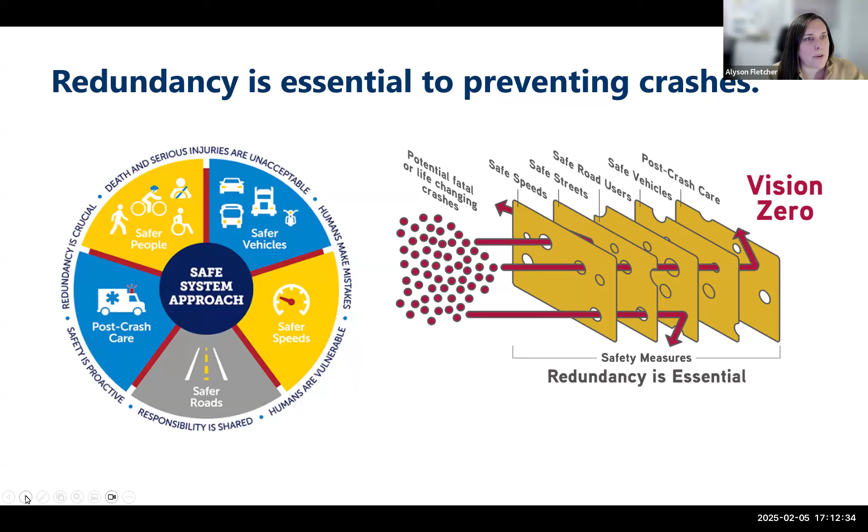Before that, we wanted to just give you a bit of insight into where we're headed. Building on the schedule I gave a preview of earlier, we've been in the business of identifying high crash locations and developing a network of where those are.

Then we start looking at the crash factors -- what are the trends of the things happening on the vineyard in terms of crashes? Then we use that to move toward what countermeasures can reverse the particular distinctive trends in your geography to develop potential projects. And then we rank and prioritize those and create a safety action plan toward implementation.

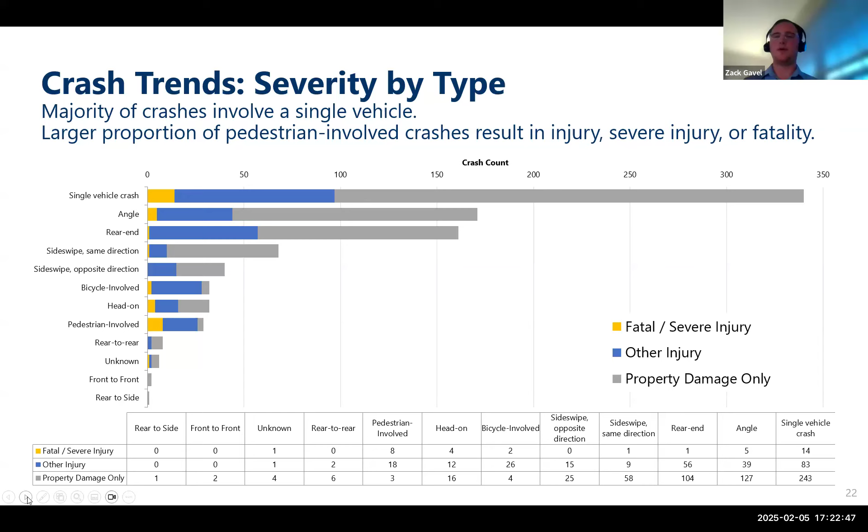So those are the trends we're looking at, trying to understand them a little bit better and then think about what solutions might be appropriate to start to mitigate some of those impacts. I know I mentioned that single vehicle crashes are the most common and the most severe in terms of crash types. You might be wondering, what is a single vehicle crash?

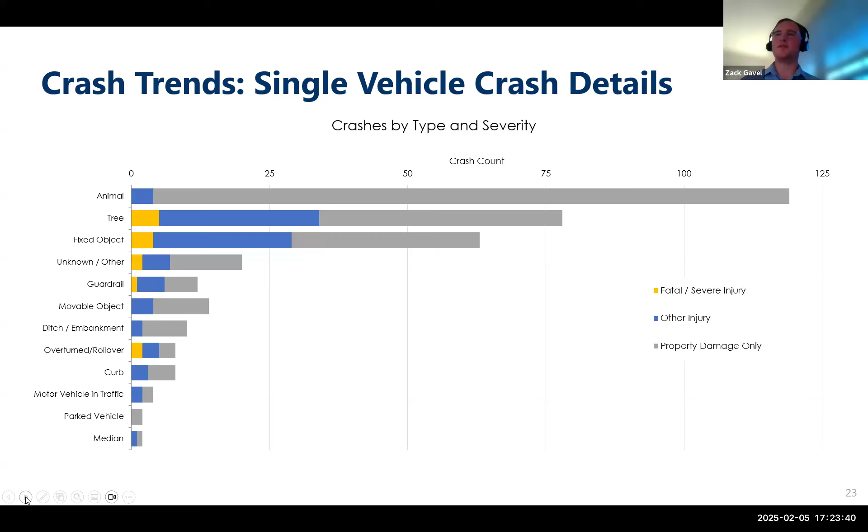A single vehicle crash is where only one vehicle is involved, and typically it collides with something off the roadway, like a tree, a fixed object, or a guardrail, or it doesn't collide with anything in particular, but it rolls over, ends up in a ditch or an embankment or something like that. Where we often see those crashes are on the more rural parts of the roadway network further up island, and we'll get into that a little bit more later in the presentation. It's less likely that those sorts of crashes result in severe outcomes when they happen in some of the down island, downtown areas, commercial corridors. It's more once you get further out where the island opens up a little bit and feels more rural, where we're seeing more of those crashes concentrated.

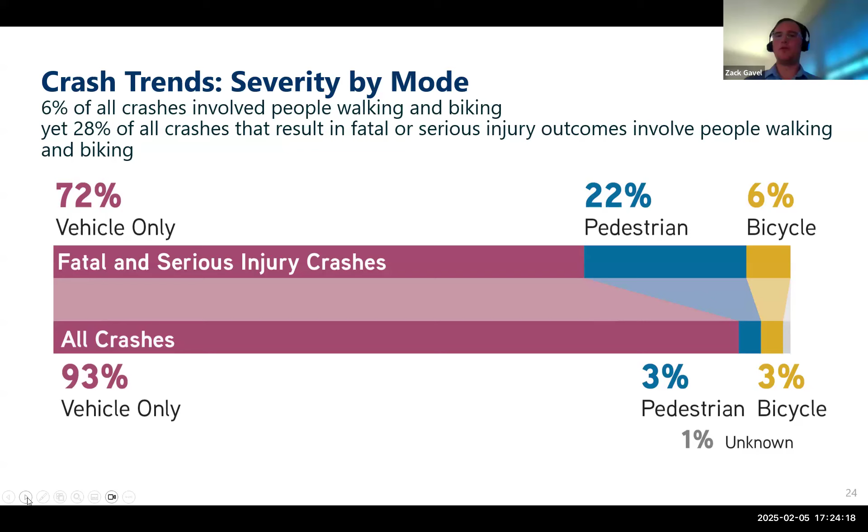I was mentioning earlier that the rates of bicycle and pedestrian crashes are exceeding the statewide average on the Vineyard. When we look at that compared to the total number of crashes, only 6% of the total crashes involve someone walking or biking, but 28% of the crashes that result in a fatal or serious injury involve someone walking or biking. So there's really a stark mismatch between the total number of crashes and the impact of those crashes on the folks involved. That's something we're really focused on trying to head off.

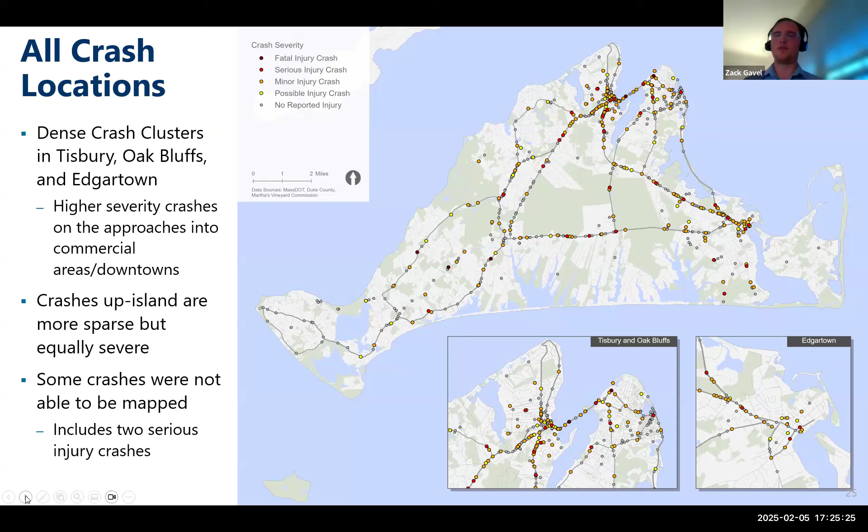What we are noticing is that there are dense crash clusters in Tisbury, Oak Bluffs, and Edgartown, those downtown areas. But crashes up island are a little more sparse, though that doesn't mean they're less severe. In fact, many of those fatal crashes are on rural roadways up island. Just to caveat, there are some crashes we're not able to map, as a product of the reports we get from DOT, which makes it so we can't always locate them in space, but we can still understand some of the trends and what may or may not be causing them.

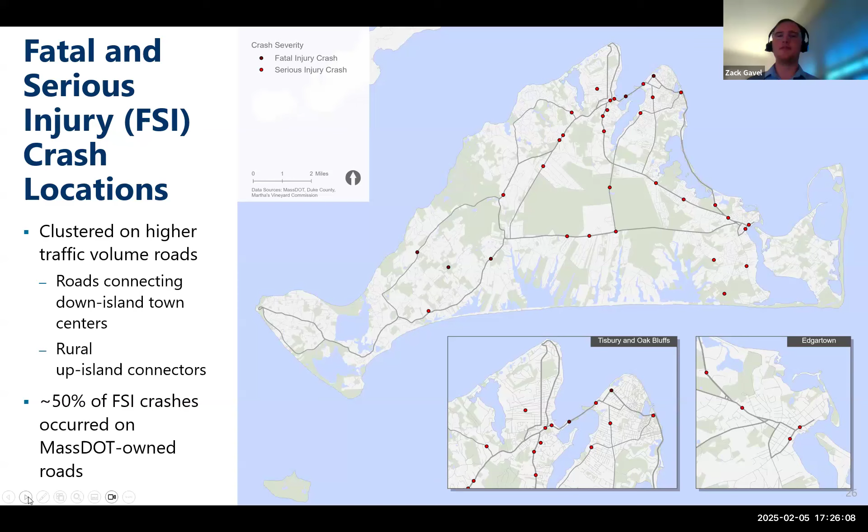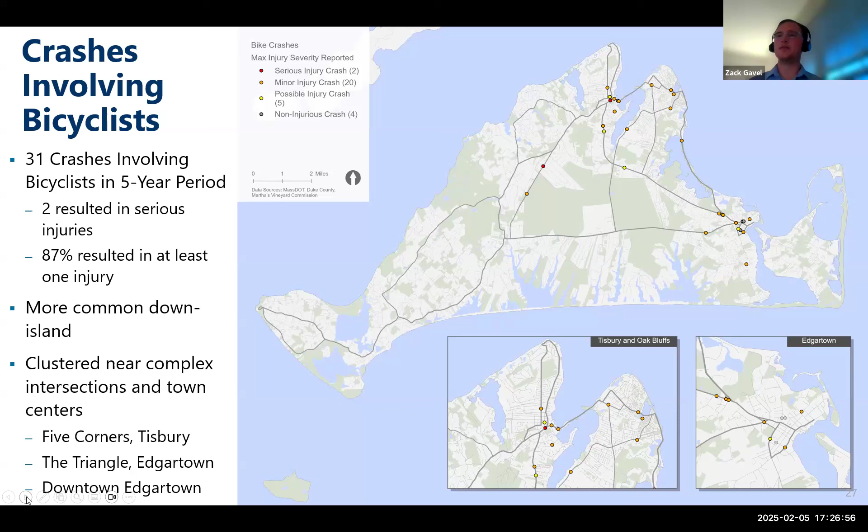When we look at where crashes involving cyclists are occurring, there were 31 of those crashes in the 5-year period we looked at, and 2 resulted in serious injury. Thank goodness, no fatalities during that time period, but 87% of those crashes did result in at least one injury. They are more common in the down island area, particularly in Tisbury near the Five Corners intersection, near the Triangle in Edgartown, and in the general downtown Edgartown area. We're seeing clusters near complex intersections and town centers, places where it might be more difficult to navigate as a cyclist, or places where you'd expect more cyclists because it's a popular destination.

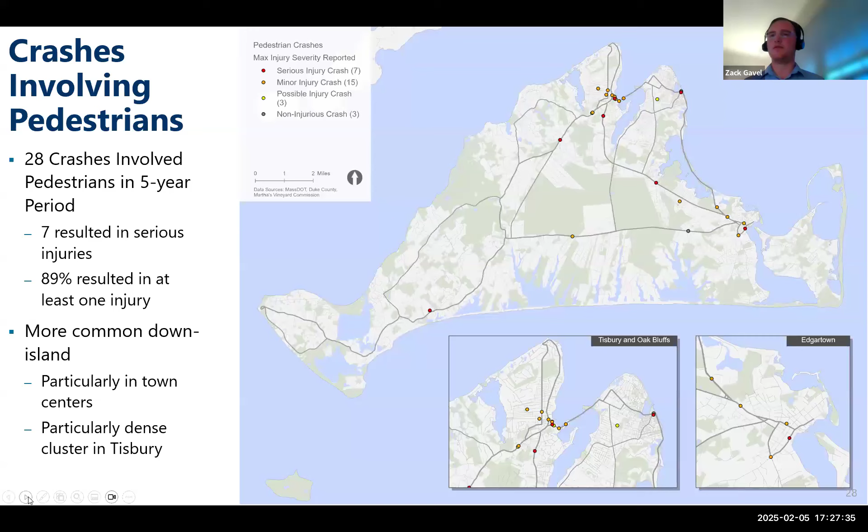So, thinking about that in conjunction with the broader conversation about how we're treating rural roads, understanding that there are a variety of different modes using those roads and how we safely accommodate all of those different uses.

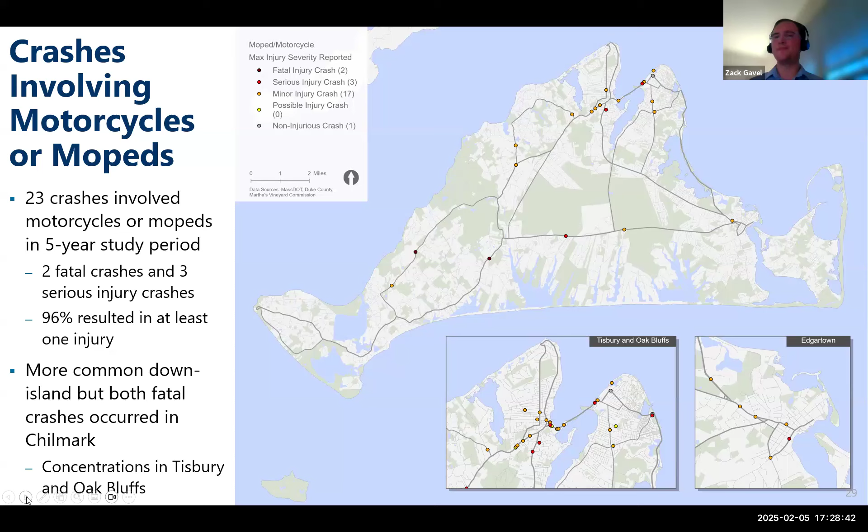And speed. Speed is the big thing in a lot of the safety work that we do. It's a very basic kinetic energy equation to understand how speed impacts the severity of crashes and the forces that act on your body in a collision. So speed is something we really want to take a close look at.

What we're seeing across the island is that speeds are generally higher than the posted speed limit, with data thanks to Bill and the folks at the Martha's Vineyard Commission. And while some of those really extreme instances of speeding—20, 30, 40 miles an hour over the speed limit—are rare, they are extremely dangerous.

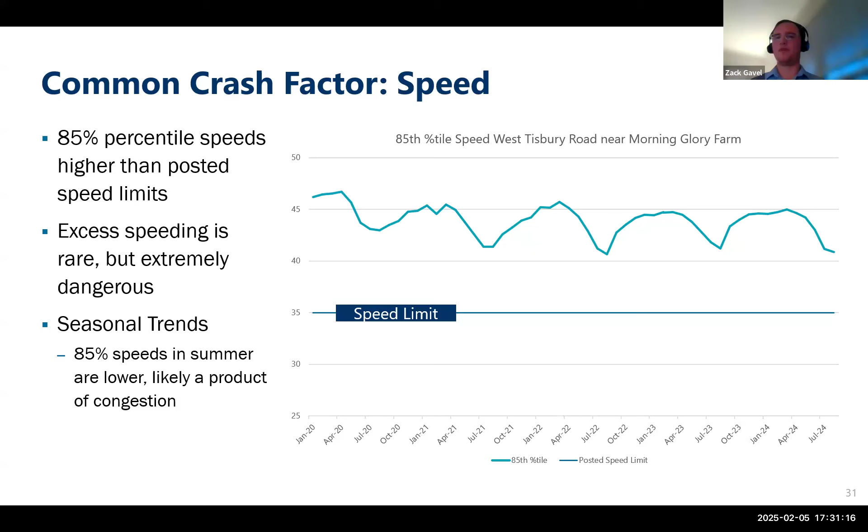Just to take a step back, the 85th percentile speed, which is what this shows, is the speed that 85% of people driving are going at or below. So just thinking about ways to make that a safer environment for everyone, whether it's designing for slower speeds, setting lower speed limits, or enforcing the speed limit more actively, educating folks—a whole host of different countermeasures we can look at here.

To put this into a finer point: when you're traveling at a higher speed, your ability to react to changes within the roadway varies pretty dramatically. For example, a pedestrian stepping out into a crosswalk in front of you—at 20 miles an hour, you might have enough time to react and brake. But as you get up towards 30 or 50 miles an hour, you might not have enough time to react and brake before colliding with that pedestrian.

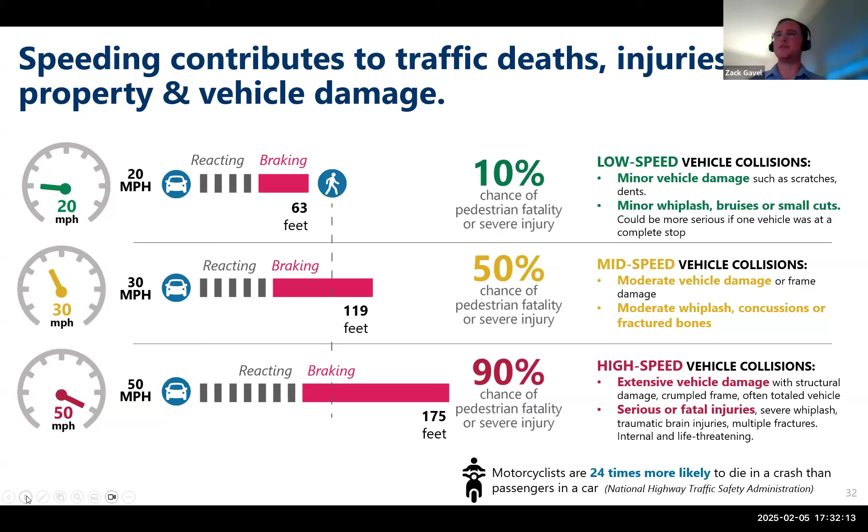So the chance of the pedestrian surviving or not being injured in that collision is significantly better at lower speeds. We're starting to think about this more holistically—how we're designing for all roadway users. Part of that is designing for safe speeds, one of the 5 pillars of that safe systems approach that Allison was walking through earlier.

So that sort of generally talks about the crash trends. The thought there is just to walk through a whole bunch of data so that you have a sense of all of the different work that we did. There's a memo on the Martha's Vineyard Commission website where you can get into the data a little bit more closely. But part of this exercise is not just to look at all of these trends, charts and graphs, but also to make sense of where we really want to focus our effort.

So the next step of the process is creating what we call a high injury network. A high injury network is a network of locations across the island that represent the places where the most severe crashes have happened over that 5-year period. We're using that network of roads and intersections to understand where we want to focus our work as part of the plan, so that we can think about how we target our work more strategically, so that there's really sound and smart investment of the resources that might be available for safety related projects.

As I talked about before, we start with that 5 years of crash data, and then we pretty much assign it to different roads on the map. We say, okay, that crash happened on Edgartown Vineyard Haven Road, perfect. We aggregate all the crashes that happened in similar places together, and we start to look for trends in space across the map. And so what we get to is something that looks like the map that you see on the screen.

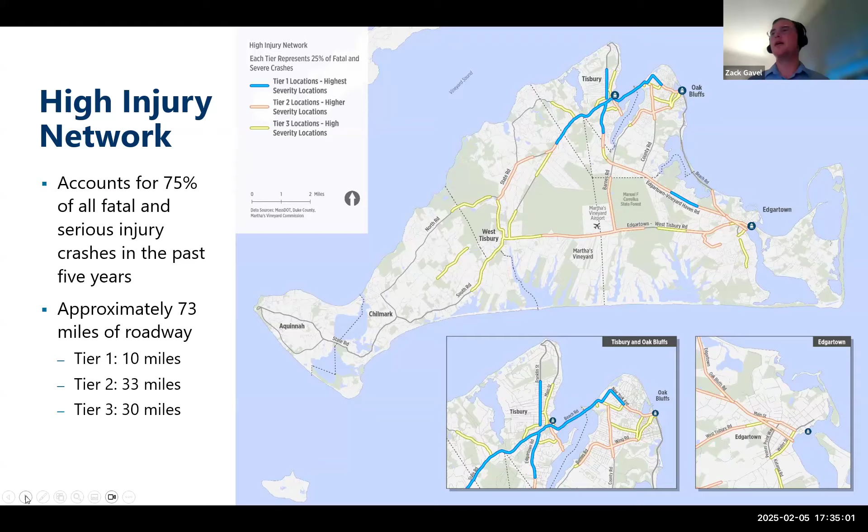So just to zoom out a little bit, so you have a sense of how we come to that high injury network: it's a combination of those top corridors and also top intersections. The reason why we think about those two things separately is because we want to be strategic about the strategies to address the challenges we're seeing based on where those challenges are occurring.

If we have a lot of crashes happening along a long stretch of road and we say, well, we're just going to fix all the intersections, that might not really get at the root of the problem. Or the inverse might be true: if we try to redesign a roadway, but the challenge is really pinpointed at an intersection, we might not be doing the best possible job we could to address the safety related challenges. So we're looking at it two different ways here.

You'll notice that these are generally across all the different communities on the island. There is a slightly higher concentration in the down island communities versus the up island communities. But that is not to say there aren't roadways worth looking at in pretty much all the communities, actually all of the communities across the vineyard.

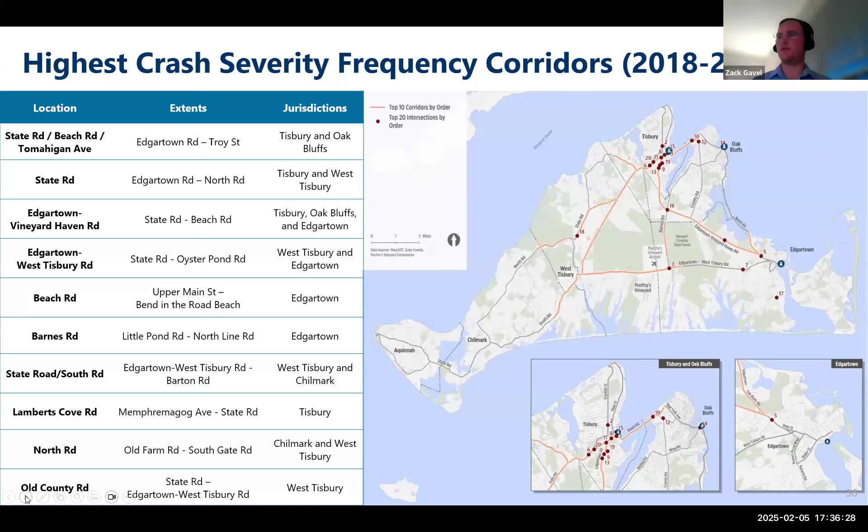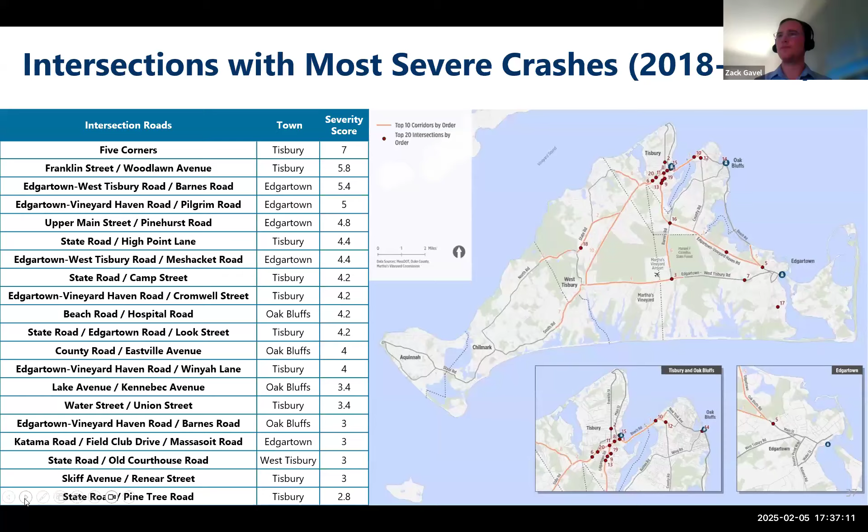I'll start to wind down my presentation by talking generally about the trends we've seen on different types of roads. The first stage of the presentation was all those charts and graphs, which might have felt a little detached from the island you all know, so let's walk through generally what's happening on different types of roads on the island.

In your commercial corridors and village center streets, we see a lot of angle collisions and side swipes—cars sliding past each other or crashing at an angle—plus pedestrian-involved crashes. Many of those only result in property damage, not the pedestrian ones, but the angles and side swipes do. What we're seeing is that the more severe incidents in village center streets involve bicyclists and pedestrians, so thinking about how to make those places safer for those roadway users is a key consideration.

On your town access roads, one step away from the town center—how you're getting in and out of town—we see a lot of rear end collisions and crashes involving people not yielding properly at locations where vehicles might be entering traffic at an intersection. Most of the more serious crashes are the result of speeds too high for the context people are operating within, or people failing to yield, drivers making mistakes as they're operating.

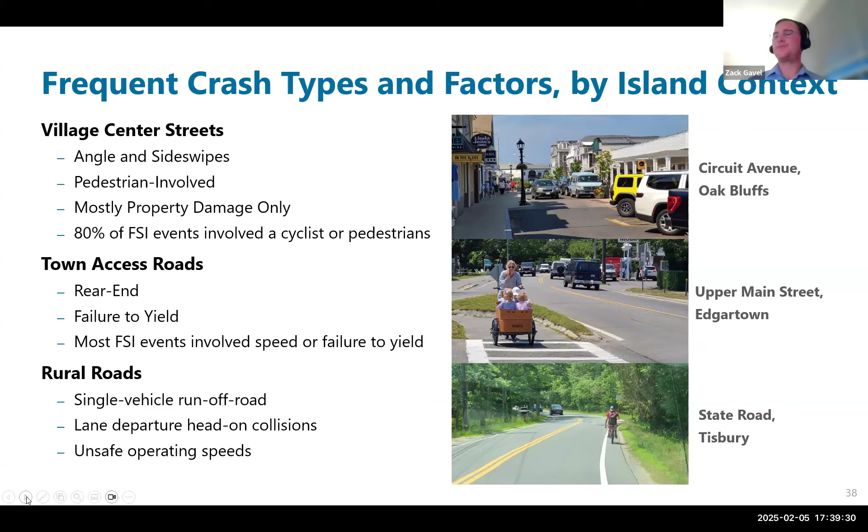All right, we're going to go back and do a little more polling. This poll is an open response question, an opportunity for you to share something that surprised you about the crash analysis—whether it's an interesting finding, something you'd like to know more about, or something you didn't know before coming to the meeting tonight. This can help us think about how to share this message with more folks on the island and make more people aware of the safety-related challenges.

I know it takes a minute or two for folks to type, so I'll linger here a little while longer. As the presentation goes on, if something really struck you, or as we get further in and start talking about safety solutions and something comes to mind, feel free to continue using the Zoom chat to offer any surprises or feedback you might have.

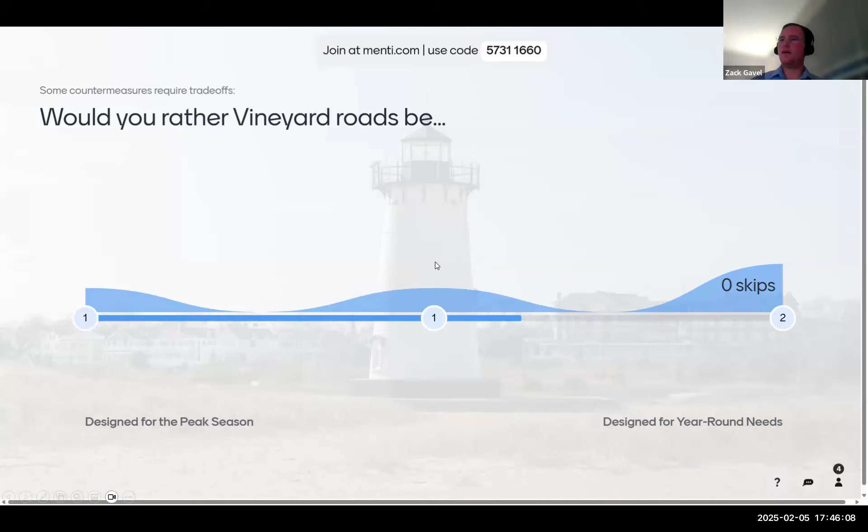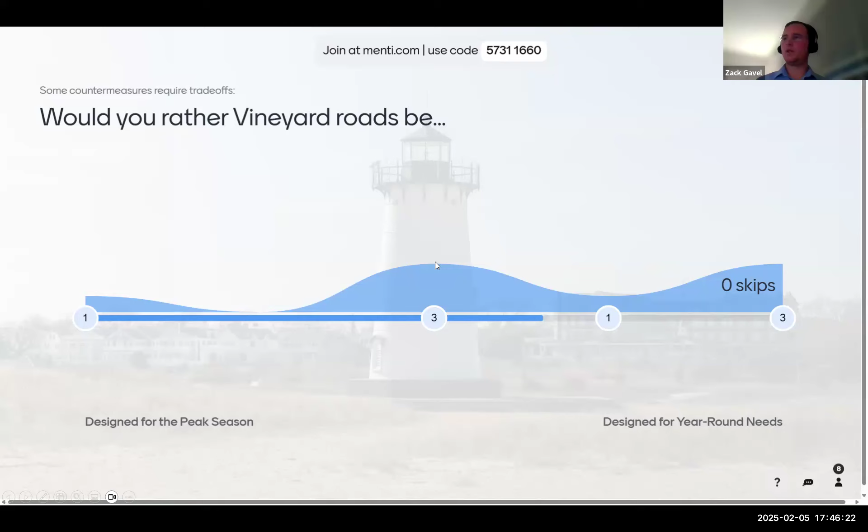All right, we are, feels like close to 50-50 on that one as well. Well, I will thank everyone for participating in that and for entertaining me as I went through all of that crash data quickly. And I'll pass it over to my colleague.

Okay, great. Thanks, Sarah. Sorry for interrupting, Zack. Great job. And we've thrown a lot of information towards you, and we want to share with you what we're going to do with it next, by way of providing some information about proven safety countermeasures. Where we are in the process, as Zack described, we've got a lot of great data informing the places where we might develop some specific projects for the Vineyard's consideration and all of your towns' consideration, moving forward, either through grants or ongoing maintenance as street repaving gets done, or through other implementation through

programs such as enforcement and education. So we're at the point where we will be reviewing the crash types that are happening at the specific locations that Zack illuminated during his presentation, and considering which countermeasures are applicable to the specific context in which those crashes are happening. We wanted to make sure that you had an opportunity to hear about some of the measures that we'll be considering as we develop the project recommendations. And we're going to use a resource called the Federal Highway Administration Proven Safety Countermeasure Database.

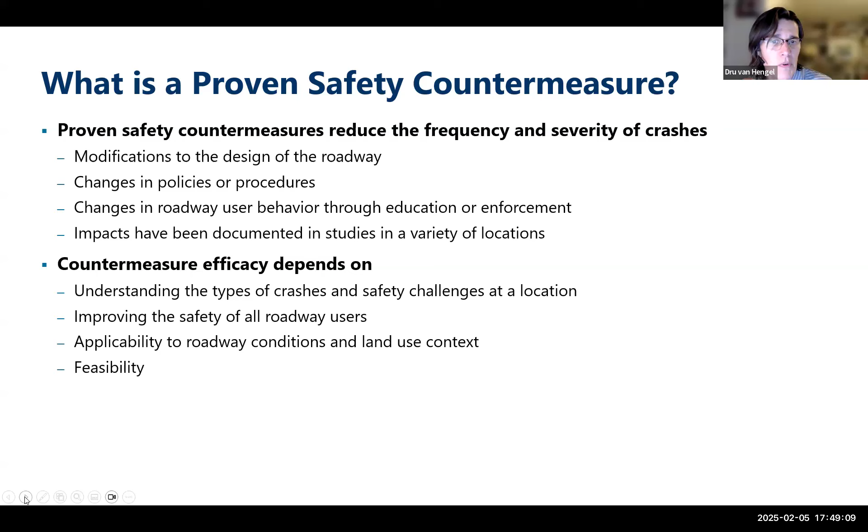Their efficacy depends upon understanding the types of crashes happening at high injury locations and intersections, the land use context at those places, the roadway conditions, and their feasibility. We think about proven safety countermeasures using a design hierarchy described by the Federal Highway Administration, which provides guidance for selecting and prioritizing countermeasures to reduce traffic fatalities and serious injuries.

The Tier 1 countermeasures are considered first because they have the highest rates of reducing the frequency and severity of collisions.

Some countermeasures are classified across various tiers because their effectiveness depends upon the land use and roadway context, and countermeasures can be paired together—they're not mutually exclusive. Lower tier countermeasures can be effective interim solutions while larger safety efforts are ongoing, since it can take several years to build up the funds and design work for larger infrastructure investments.

So the tiers are: Tier 1, remove severe conflicts; Tier 2, reduce vehicle speeds; Tier 3, manage conflicts in time; and Tier 4, increase attentiveness and awareness.

A couple of things about the... thanks, you're great, next slide.

A couple of things about Tier 1 countermeasures: they minimize the potential for conflict and therefore crashes. They do that by separating road users moving at different speeds, thereby reducing the impact of crashes should they happen and increasing the opportunity to prevent crashes, because potential conflicts can be seen as people are moving at slower speeds.

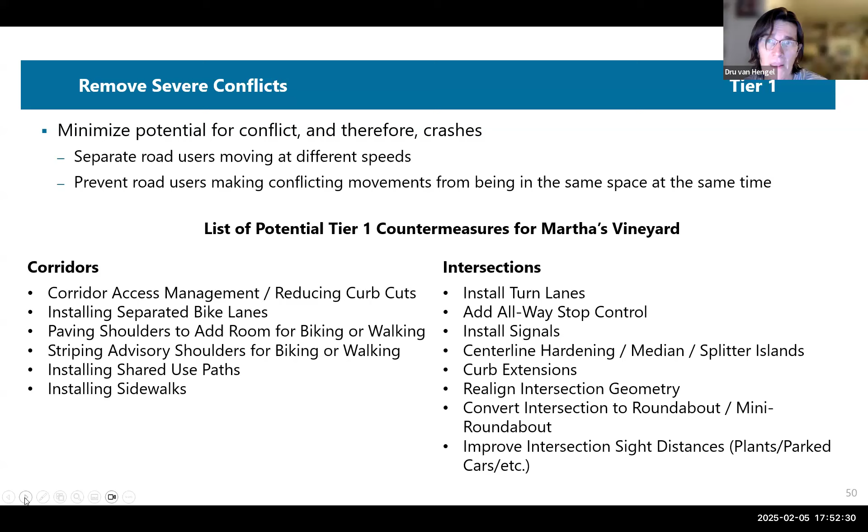So these are the Tier 1 countermeasures we're considering, and most of them I'll talk about in more detail with respect to the types of crashes that they reduce.

Tier 2 countermeasures reduce vehicle speeds. Slower speeds reduce the kinetic energy involved in a crash and the transfer of energy—large transfers of energy, particularly from people driving to people walking or biking, cause more severe crashes. So the slower we go, the lower the kinetic energy is when those two masses meet each other, and reducing vehicle speeds limits the severity of crashes that do happen.

Corridor improvements include lane narrowing, adding speed humps or speed tables, and adding mid-block crossings or raised mid-block crossings. Intersection improvements include raised intersections, centerline hardening, medians or splitter islands, realigning intersection geometries as described before, and converting intersections to roundabouts or mini traffic circles.

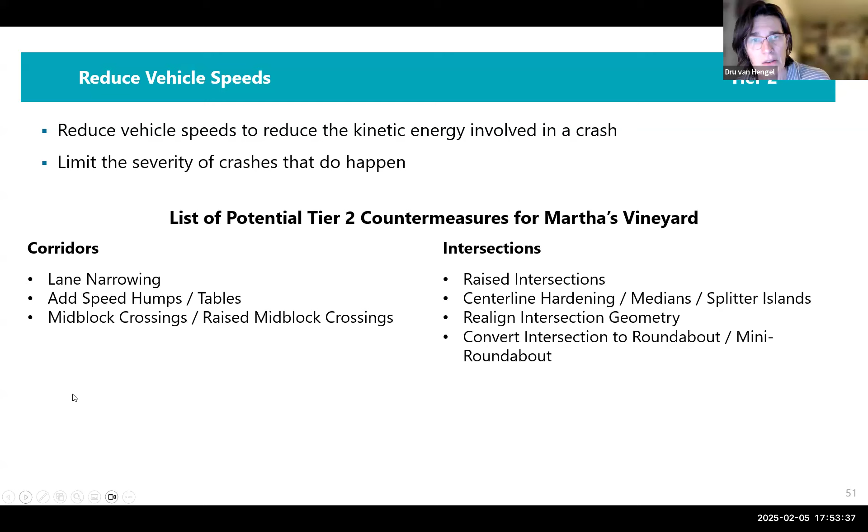As mentioned earlier, you'll hear some repeat of countermeasures between Tier 1 and Tier 2, because they serve different purposes and have different levels of efficacy depending on the roadway and land use context. The third tier is the management of conflicts in time.

In tier 1, we separate users in space. In tier 3, we separate users in time, so people take turns using common roadway space, using tier 3 countermeasures. There are discrete and alternating opportunities to navigate the roadway environment. A classic example is a two-phase traffic signal where one direction goes in period 1, then that direction is stopped, and the other direction gets to go in the second phase. Some countermeasures we're considering for the vineyard here are, along corridors, pedestrian hybrid beacons, and at intersections, converting to all-way stop control or installing signals.

Finally, the tier 4 countermeasures increase attentiveness and awareness. There was some concern about distracted driving, and these countermeasures increase the level of attention people have when using the roadway. They raise alertness to the potential for conflicts or changing roadway conditions. Examples for corridor level treatments include rectangular rapid flashing beacons, edge line or center line rumble strips, roadway visibility improvements, speed feedback signs, increased quantity of posted speed limit signs, curve delineation signs, and striped mid-block crossings. For intersections: installing or upgrading to larger regulatory signs, increasing advanced signage, transverse rumble strips on approaches to intersections, and improving intersection sight distances by removing impediments to visibility at sight triangles where streets meet. We'll provide more detail about the list of countermeasures I just ran through.

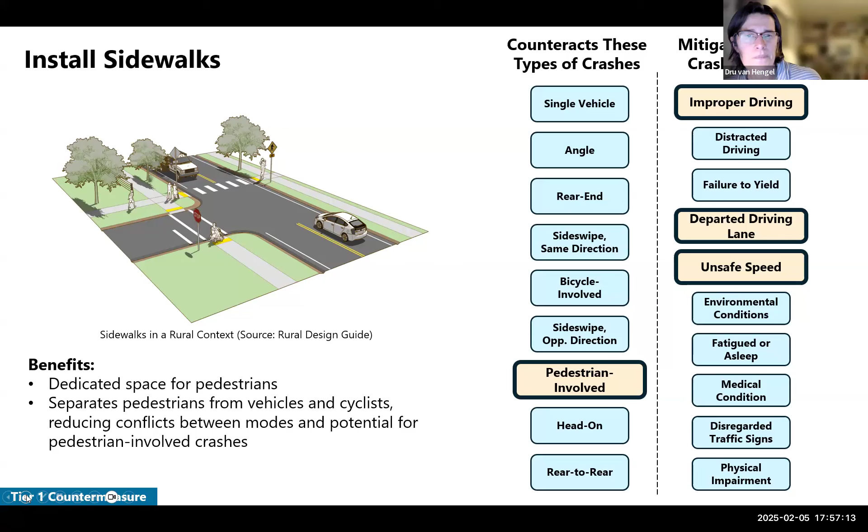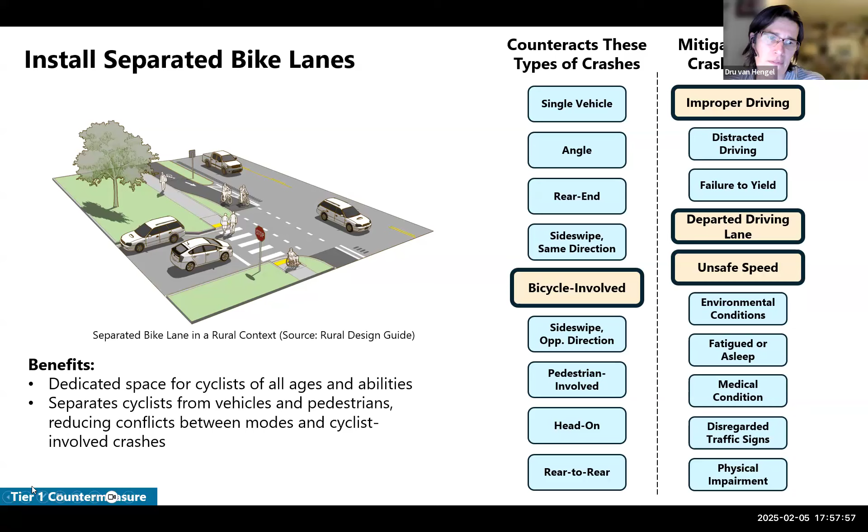I didn't give you an orientation to the graphic on the left of each of these slides, but clearly these are graphics illustrating the countermeasure, and in some cases we'll have photographs of the countermeasure so you can become accustomed to what they look like.

Another improvement is the expansion or installation of shared use paths, which can accommodate both people walking and bicycling. The benefits are that they dedicate a shared space for people walking and biking, take less space than separate sidewalks and bike lanes combined, and separate vulnerable modes from vehicles, reducing conflicts between modes and the potential for crashes. This countermeasure counteracts both bicycle and pedestrian-involved crashes and mitigates crash factors such as improper driving, departure from the driving lane, and unsafe speed.

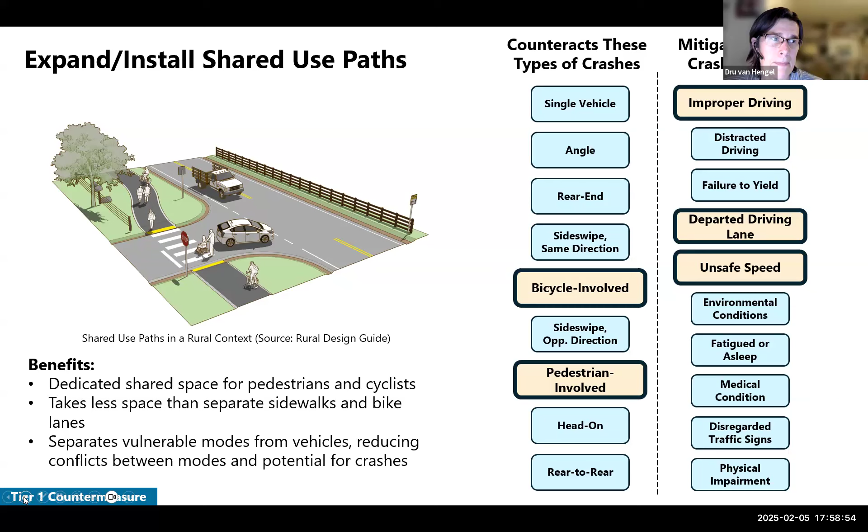Paving shoulders to add room for biking and walking is very common in contexts such as those throughout towns and connections between towns. The benefit of this treatment is that it provides dedicated space on the roadway for cyclists and pedestrians in locations where the available right-of-way to install formal bike lanes or shared use paths is too small. It counteracts bicycle and pedestrian-involved crashes and mitigates the crash factors of improper driving, departure from the driving lane, and unsafe speed.

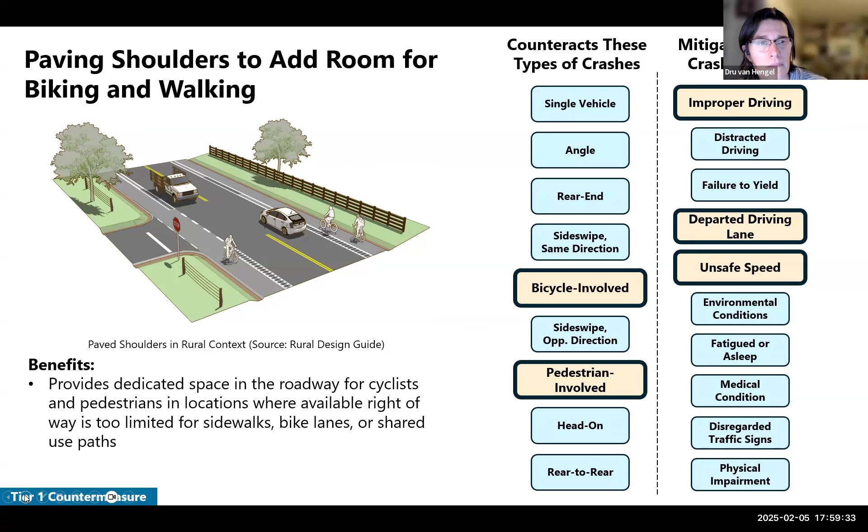Am I behind a slide? I am. Striping advisory shoulders for... did I already just talk about this one? No, I think it's similar but different.

Paved shoulders and advisory bike lanes are similar in that there's no vertical separation between the driving lane and the lane for walking or biking, but they take advantage of situations where there's insufficient space to install a formal bike lane or shared use path. They delineate the space, but they don't dedicate it specifically.

The width is insufficient for two vehicles to pass each other at the same time that people walking or bicycling are using those lanes. It's a common treatment in Europe, particularly used on low speed, narrow streets so that the shared space is safe. It's also used on low volume streets, where the probability of all those modes being in the same space at the same time is very low.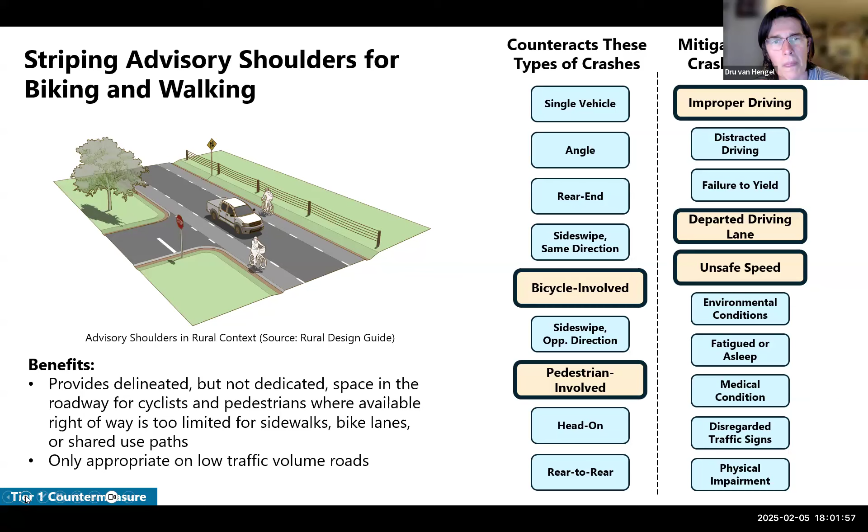Corridor access management and reduction in curb cuts is something a little more familiar probably to everybody here. This treatment makes vehicle turning movements more predictable. It's more clear when drivers are going to be crossing the driveway, and at what point of the driveway, especially on driveways with long widths and without particular dedication for sidewalks or people walking.

They reduce the exposure for pedestrians and cyclists as they walk along the frontage because of the dedicated, consolidated area where people driving would cross over the pathway that people are walking and bicycling on. Crashes counteracted by this countermeasure include angle crashes, bicycle-involved crashes, and pedestrian-involved crashes, and this treatment mitigates failure to yield and unsafe speeds.

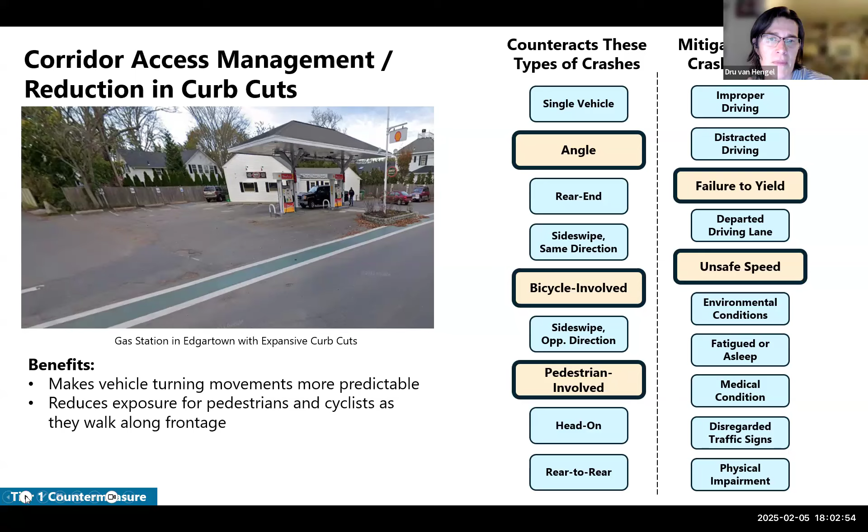Lane narrowing reduces vehicle speeds. It gives drivers the perspective that the space available to drive is narrower. There's a lot of research that shows as you move from a 12-foot travel lane to an 11-foot travel lane to a 10-foot travel lane, driver speed decreases proportionally to those changes.

So we look at this countermeasure as a very simple way to reduce vehicle speeds. Another benefit is that it reduces shared use, providing an opportunity for people walking to be out of the travel lane. Therefore, people walking and bicycling, though not on a dedicated facility, are not also in the lane striped for people driving. It allows roadway space to be reallocated for other purposes, such as parking, sidewalks, bike lanes, or shared use paths.

This countermeasure counteracts rear-end crashes, bicycle-involved crashes, and pedestrian-involved crashes, and it importantly mitigates the crash factor of unsafe speed.

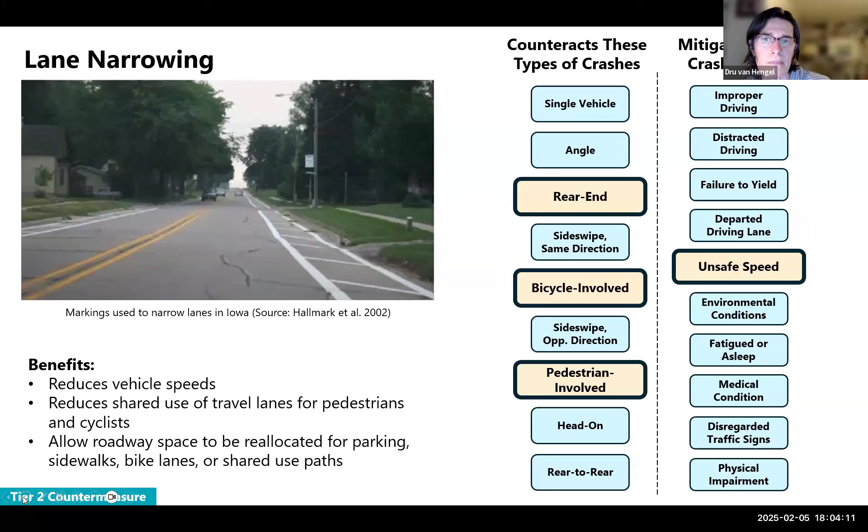Adding speed humps or speed tables along a roadway supports slower driving speeds and encourages drivers to be more alert to their surroundings. They prevent rear-end crashes and mitigate crash factors of improper driving, distracted driving, unsafe speed, and fatigue.

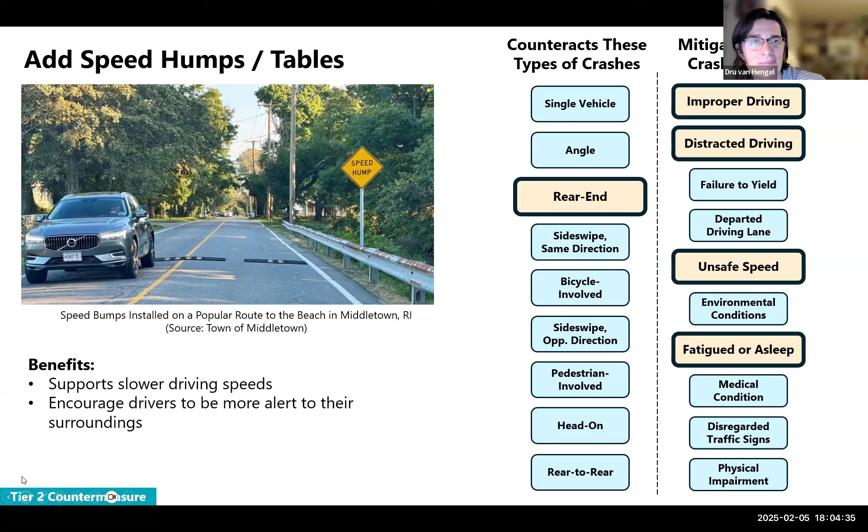Our next feature is mid-block crossings or raised mid-block crossings. These are provided where the distance between crossings is large, giving pedestrians safe locations to cross the road with minimal out-of-direction walking. When raised, they can double as traffic calming devices. They counteract pedestrian-involved crashes and mitigate crash factors related to failure to yield and unsafe speeds.

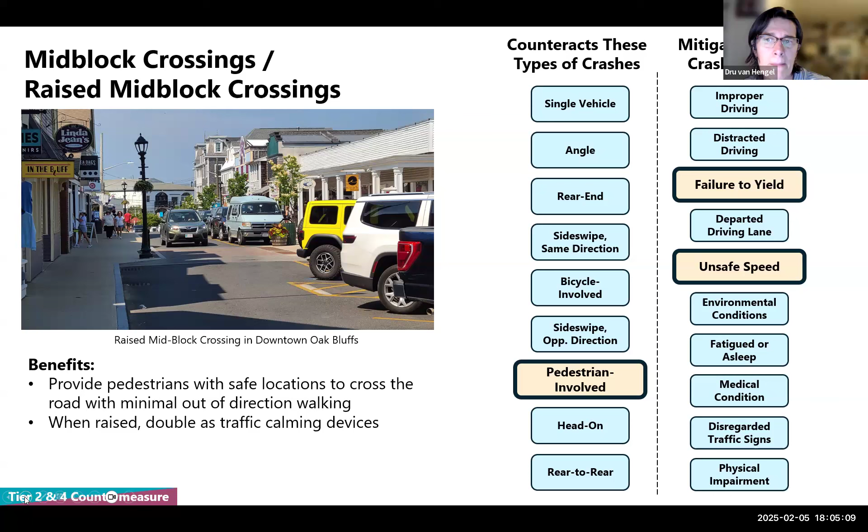Gateway treatments raise the visibility of the edge of the roadway. They increase the rate of yielding to pedestrians in the crosswalk and provide a visual cue to drivers to slow down as the roadway context changes. The gateway treatment here includes paving and two warning signs to let people know others might be crossing the street, along with the marked crosswalk. These countermeasures reduce rear-end crashes and pedestrian-involved crashes, mitigating causes including failure to yield and unsafe speeds.

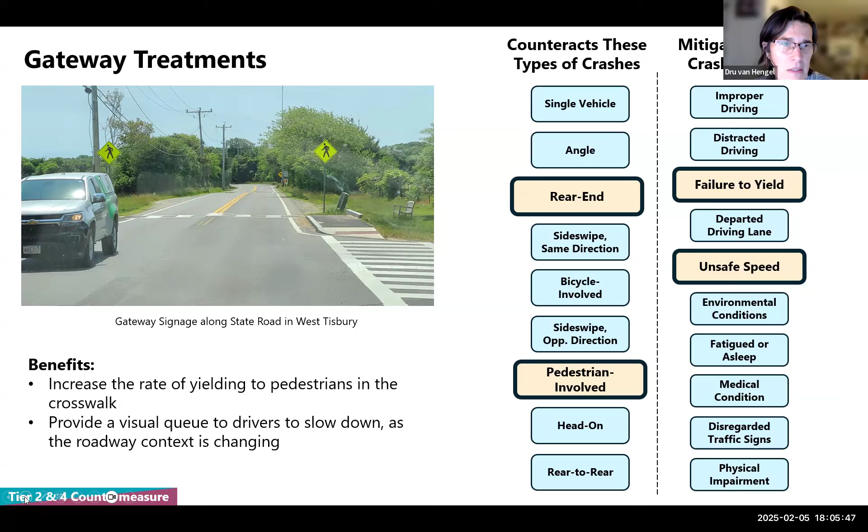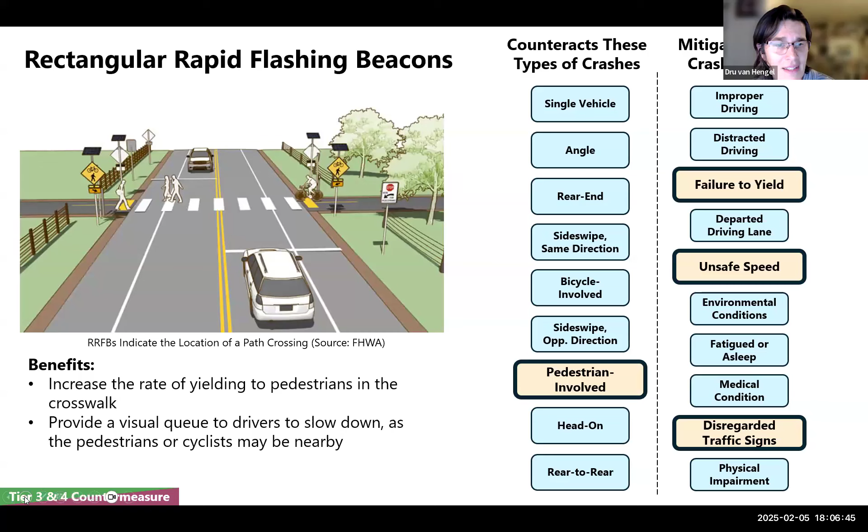Edgeline and centerline rumble strips are aligned or adjacent to the fog lines on the edge of roads, and sometimes they can also be applied on the center line, the yellow line that separates the two directions of traffic. They provide a vibration to drivers who begin to deviate from their travel lane, encouraging drivers to be more alert to their surroundings and changing roadway context.

They counteract these specific types of crashes, which we've observed on the Vineyard: the single vehicle crash, the side swipe, and opposite direction head-on crashes, if they're applied to the center line. They mitigate crash factors of distracted driving, departure from the driving lane, unsafe speeds, and fatigue or sleepiness.

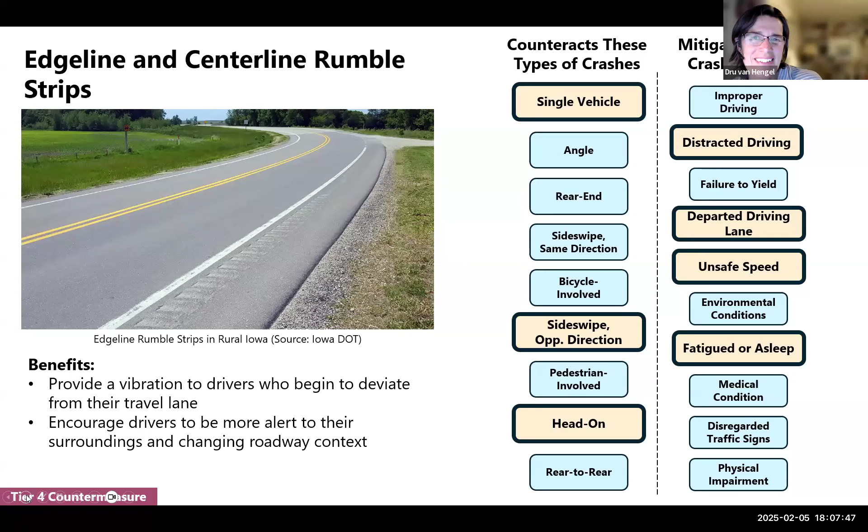Another treatment on the edge or on the center line is roadway visibility improvements. Here in this picture we see examples of raised pavement markings. The benefits of these visibility improvements are that they provide visual guidance to drivers traveling at night.

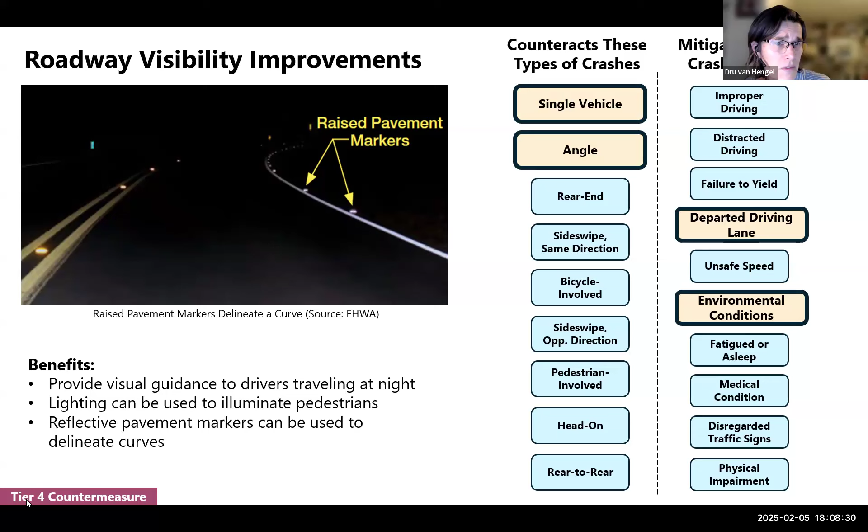Another type of roadway visibility improvement is lighting, which can be used to illuminate pedestrians either along the road or as they're crossing at intersections. Reflective pavement markings can also be used to delineate curves. They counteract single vehicle crashes and angle crashes, and they mitigate the crash factors of departure from the driving lane and environmental conditions, such as rain and darkness.

Speed feedback and speed limit signs. This one on the right gives the driver some feedback about what speed they are traveling in relationship to the regulatory speed limit in place at that location. The benefit of this treatment is that it provides visual reinforcement of the speed limit and the operating speed together.

They encourage drivers to slow their speeds to the posted speed limit, which is safer for all roadway users. They counteract many types of crashes, including single vehicle, rear end, bicycle involved crashes, and pedestrian involved crashes, and they mitigate the crash factors of improper driving, unsafe speed, and disregard for traffic signs.

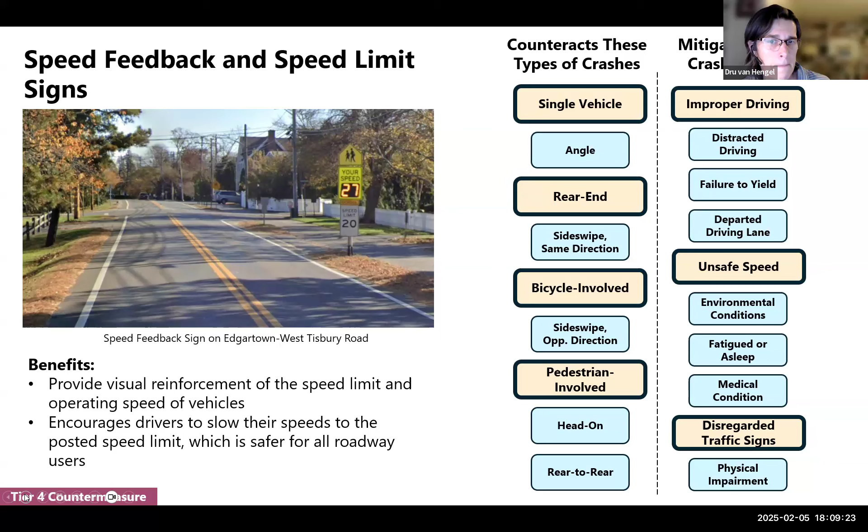Curve advance warning signs, chevrons, and delineators give drivers cues about upcoming, maybe unforeseen conditions of the road. They provide visual reinforcement of the steepness of upcoming curves, encouraging drivers to slow their speeds to appropriately navigate the curve or the change in elevation.

They counteract single vehicle crashes and head-on crashes, and they mitigate the crash factors of departure from the driving lane, unsafe speed, and disregard for traffic signs.

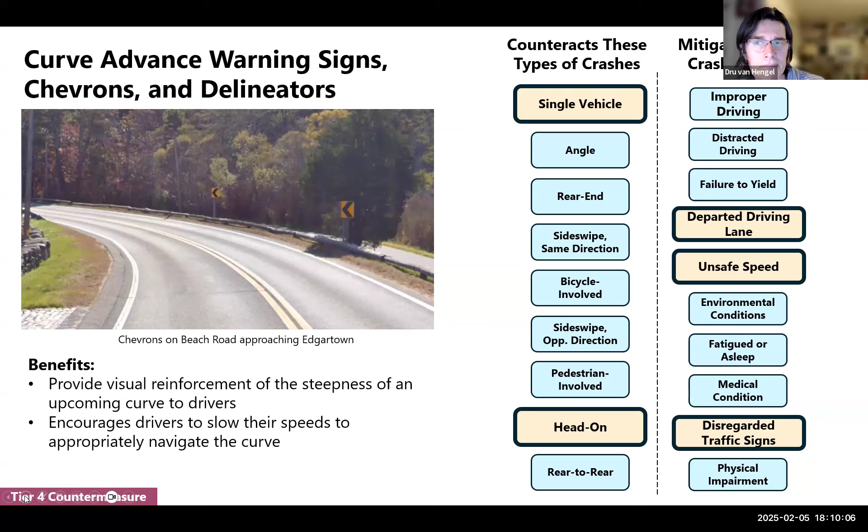The installation of dedicated turn lanes can be useful in specific conditions. They have the drawback that across the street, they might increase the number of lanes a pedestrian is exposed to, but from the driving perspective, they reduce crashes caused by sudden stopping or making turns, such as rear end collisions, and they can provide improved visibility of oncoming traffic for turning vehicles, and they can decrease congestion.

They counteract angle crashes, rear end crashes, bicycle involved crashes, and pedestrian involved crashes, and they mitigate the crash factors of failure to yield and unsafe speeds.

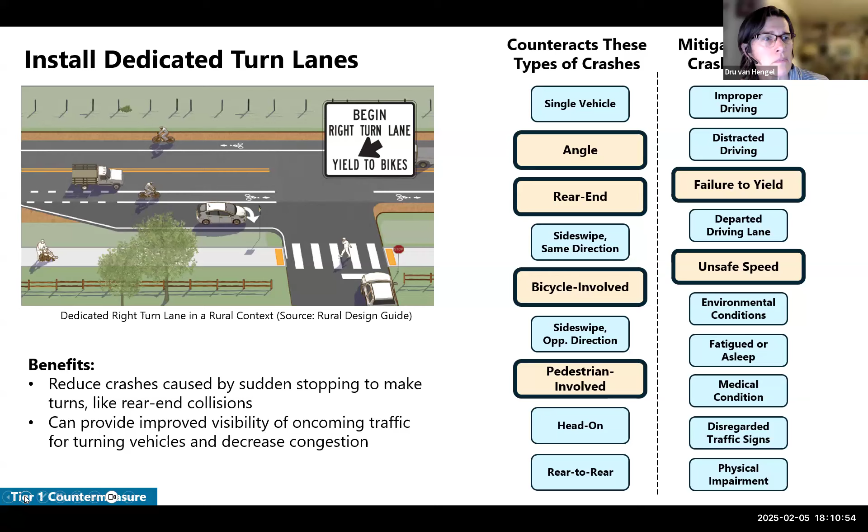Other intersection elements include the installation of protected intersections. Protected intersections provide a dedicated space at intersections for all modal users: people walking, people biking, people driving. The pavement markings delineate the crossing paths for cyclists and pedestrians, and turn wedges, which is the oval treatment in the very middle of the slide.

They slow turning speeds and improve visibility between crossing pedestrians and cyclists and turning vehicles. They counteract angle crashes, bicycle involved crashes, and pedestrian involved crashes, and they mitigate the crash factors of failure to yield and unsafe speed.

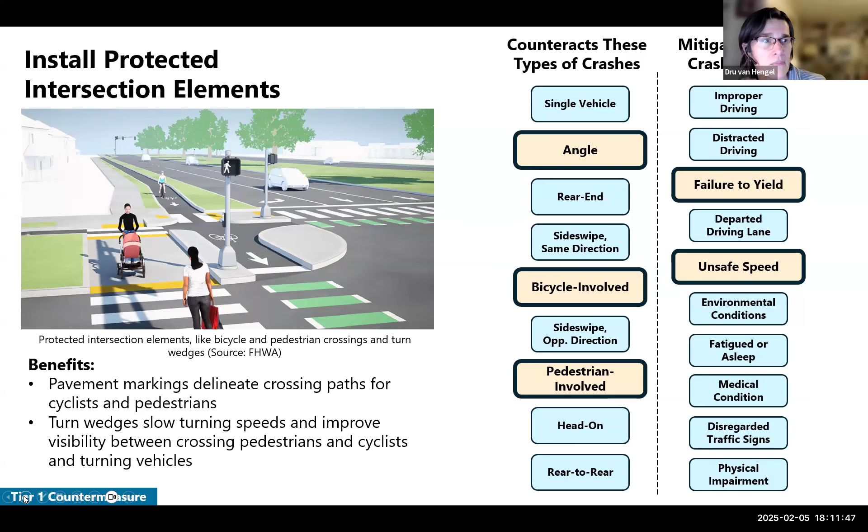Realigning intersection geometry is something we're looking at in multiple locations that have wide or Y-shaped intersections with the main road. The benefits of realigning their geometry to be more right angle is that intersection angles closer to 90 degrees improve visibility and result in safer turning speeds and more predictable turning movements. They also reduce the crossing distance for people walking and bicycling because there's shorter exposure to traffic coming onto or off of the main road. This treatment counteracts angle collisions, rear end collisions, bicycle involved collisions, and pedestrian involved collisions, and mitigates the crash factors of failure to yield and unsafe speeds.

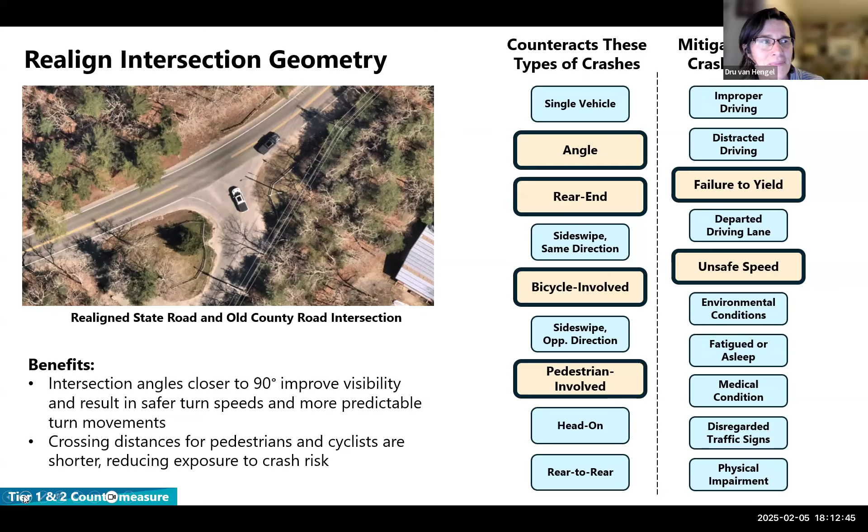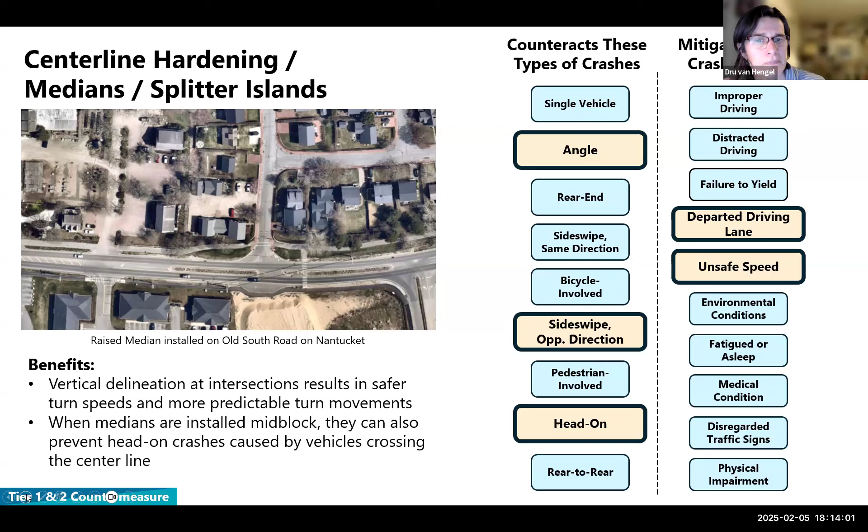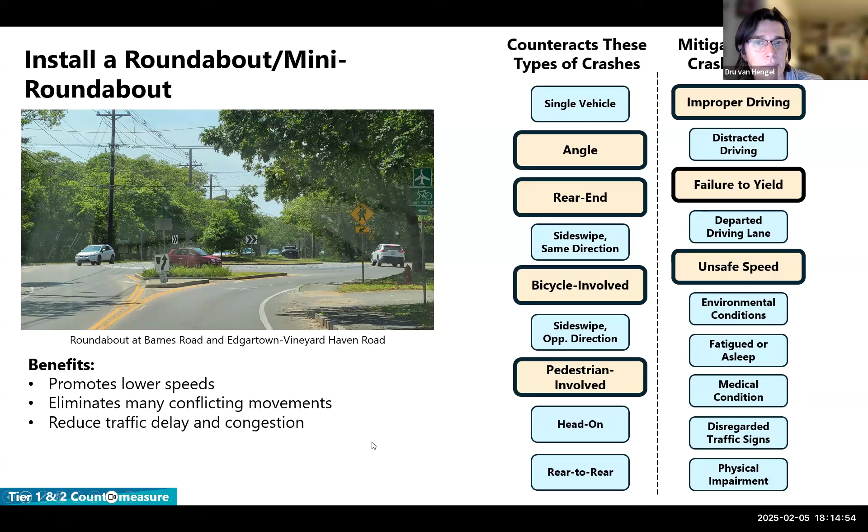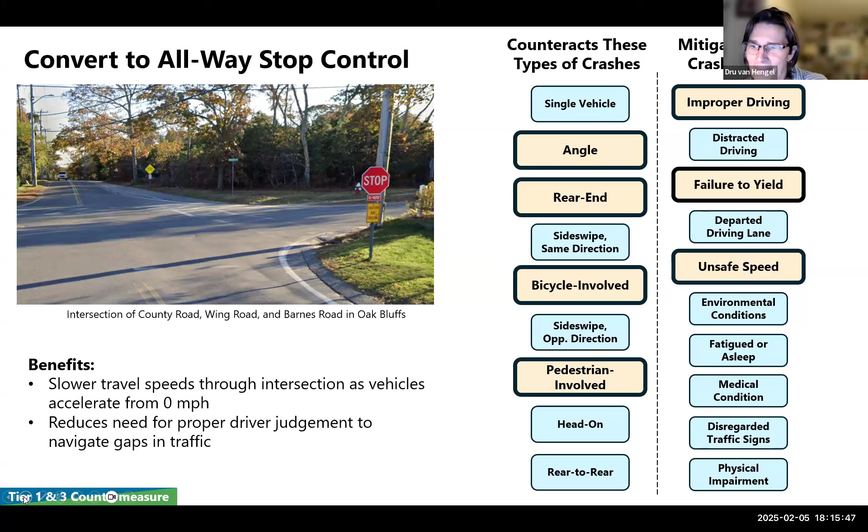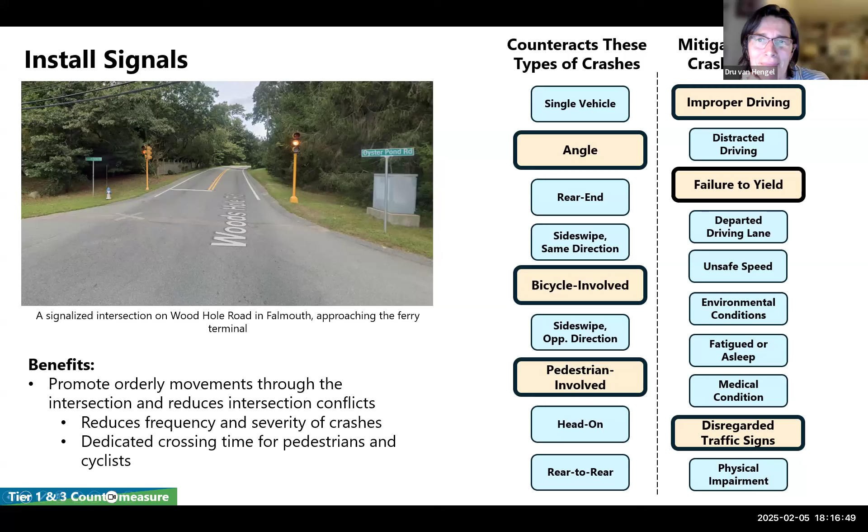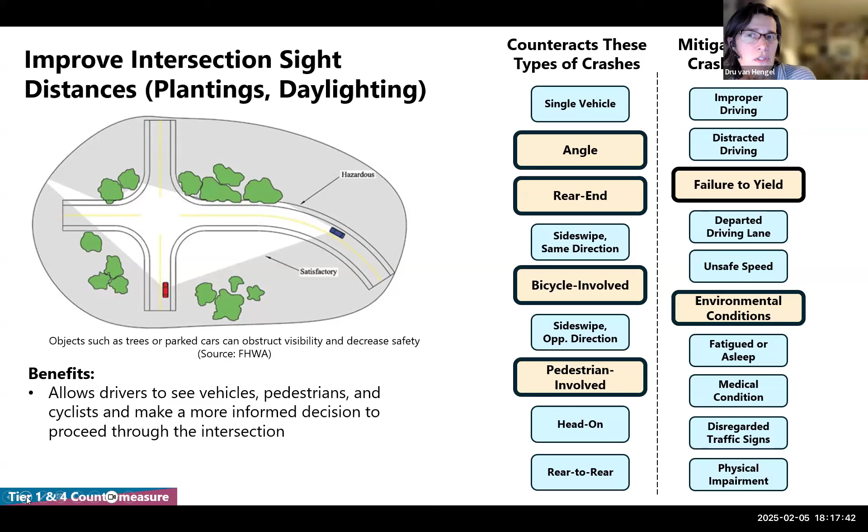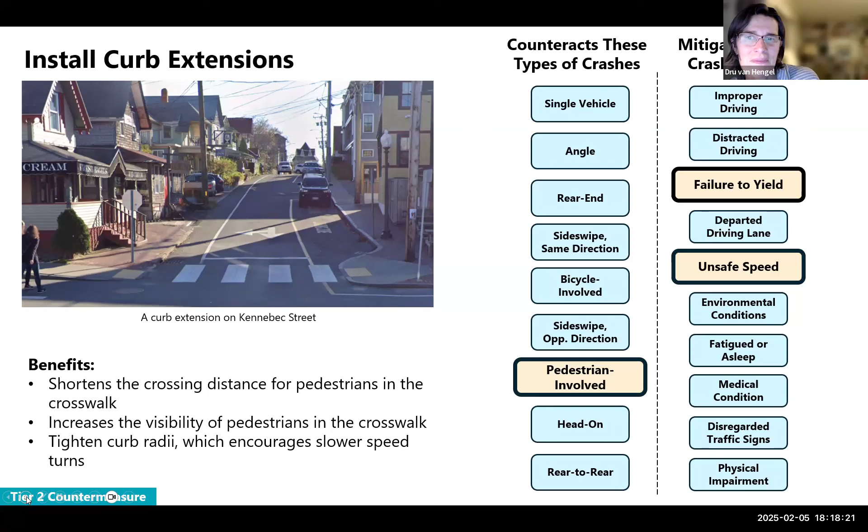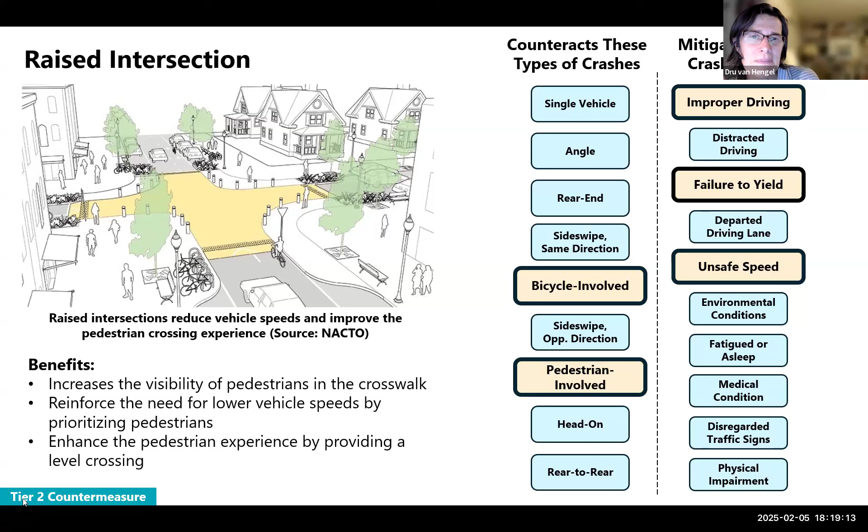Just a couple more. Raised intersections elevate the driving lane as a driver approaches an intersection where the probability of conflicts is higher. They reduce vehicle speeds and improve the pedestrian crossing experience. The elevation starts at the beginning of the crosswalk and continues through the intersection to the other side. These treatments increase the visibility of people walking, reinforce the need for lower vehicle speeds by prioritizing pedestrians, and provide a level crossing. They reduce bicycle-involved and pedestrian-involved crashes, and mitigate crash factors like improper driving, failure to yield, and unsafe speeds.

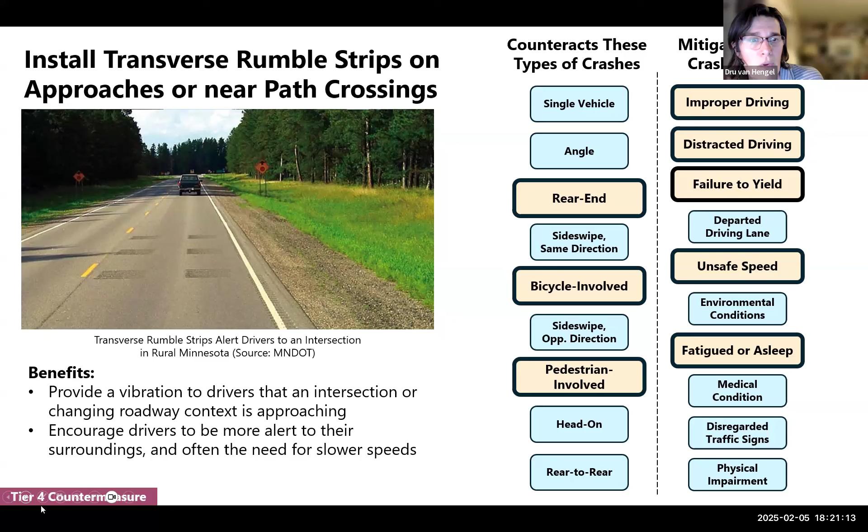We've gone through this list of potential elements we'll be considering as we develop project descriptions for the high injury locations, but we also want to reinforce that this is a wraparound plan for the vineyard, and our plan will include proven countermeasures related to program, policy, and education. Examples include education for new drivers, moped or bicycle renters, media campaigns on key safety topics related to the types of crashes we're seeing, policy changes such as setting appropriate speed limits to the adjacent land use context or design strategies, and adopting a Vision Zero policy commitment, perhaps via this planning effort. Programs can include traffic calming and safe routes to school, and enforcement strategies can include targeted speed limit enforcement on roadways with unsafe speeds at particular times or days, and yield enforcement tactics at high crash locations.

So our roadmap to implementation is getting nearer to the arrow on the right-hand side of this graphic. We'll be working through the particular types of crashes happening at the high injury locations, drilling down to select and recommend the proven safety countermeasures that best match the roadway context and local crash context for each location, and moving forward towards more refined project development, prioritization, and implementation.

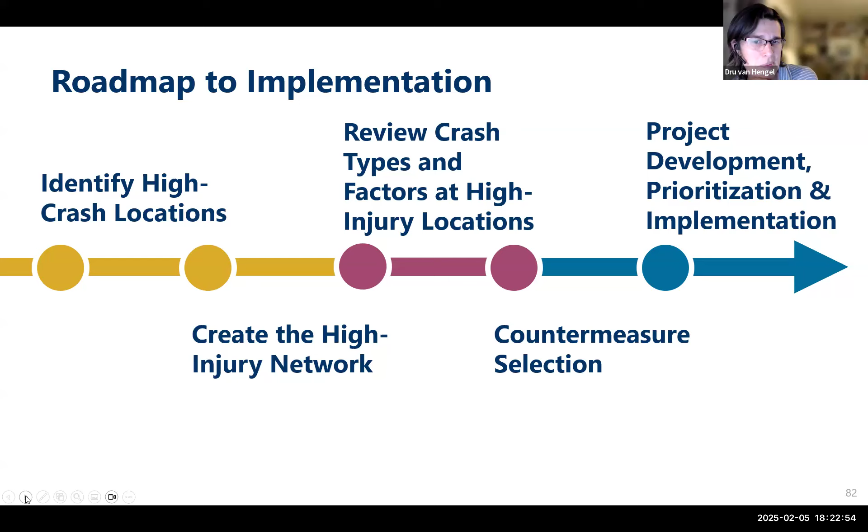And as we head that way, Alyson's going to tell us about your opportunities for providing feedback about our approach and our outcome.

Thank you. Also, thanks to Bill and Dan for championing this plan, and to Dru and Zach for going through all this information so thoroughly. We wanted to really distill what the story is of what we've been seeing in the data in recent years, and what that's saying about island trends, and also provide this meeting and recording, which will go online later, as a resource for what the national research is also saying about how to be responsive to those trends.

As Dru was alluding, it's not a one-size-fits-all situation. There's a lot of different tools in the box, from infrastructure to softer measures. Your guidance and input in response to seeing all this information is really important to us to understand the rest of the story.

So there's a few different ways for engagement. I dropped some of these in the chat, and they'll be posted on the Martha's Vineyard Commission page. There's this forum, and this recording will be online. The Mentimeter poll should open up again after the meeting closes, so if other people watch this later and participate, it should stay open for the next two weeks. And then there's also an online map.

Some of you have already participated in this. It got published at the same time we were promoting this meeting. That's a place where you can drop map dots - we'll preview that in a second. There's also an online survey. Both the online survey and the online map will be open until March 1st, so we really want as much participation as possible in the next month on these.

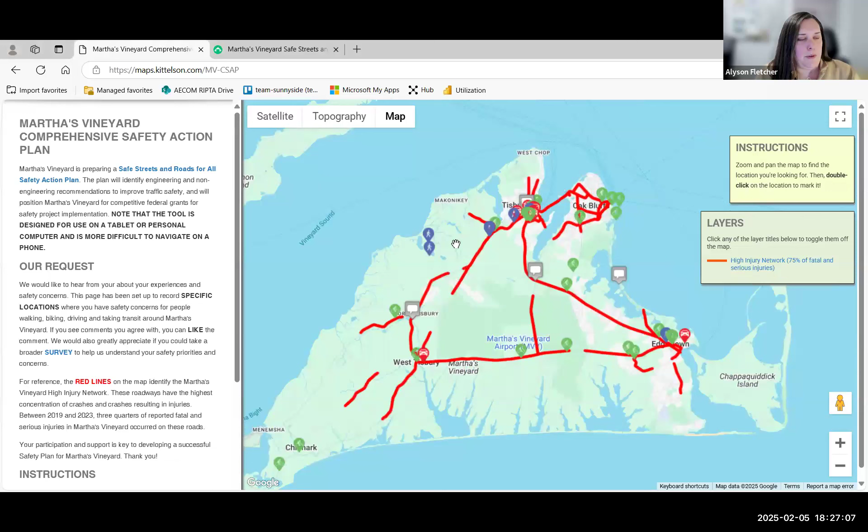So you can see some of those dots that are already lit up there. And if we could do a potential additional one, Zach, just dropping in at a particular intersection, so they can see what pops up - go to Five Corners.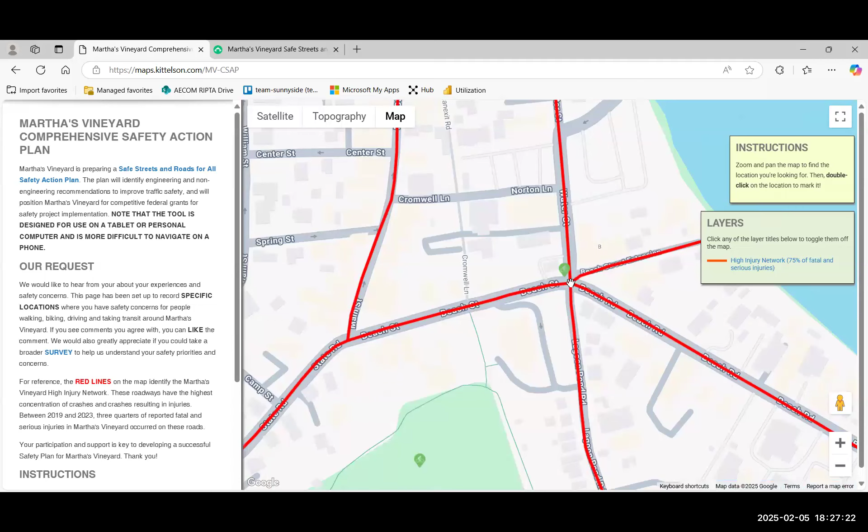So you would click on your screen and it'll populate this field on the left, which is, as you saw in the PowerPoint slides, an opportunity for you to provide feedback, to list out the category of concern you might be having, whether it's walking, biking, driving, or public transit. The contact information is optional, but it's an opportunity for us to follow up if we have additional questions based on the feedback you've provided.

This last question down here is about near misses. So to Alyson's point, we're not going to see near misses in the crash data, but if you check yes that you've had a near miss at this location, it helps us understand broader trends of where those might be occurring.

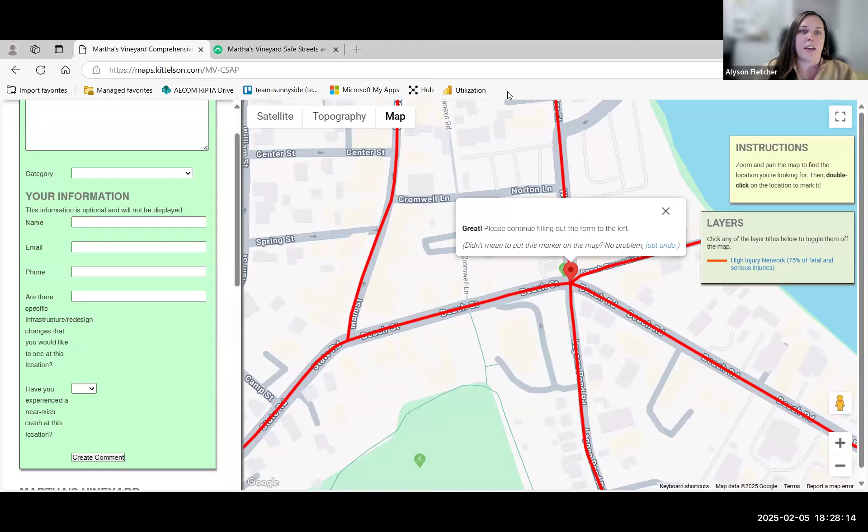That's great. As you navigate back to the slides, I can talk a little about the online survey. We've designed it to be pretty short. It gets into some of the same polling questions we had during the meeting today about what type of resident you are, your mode of travel. There are questions about how relatively safe or unsafe you feel when traveling in different modes. It'll ask about your priorities, whether you want to put safety for people walking first and other things later.

There's also a couple opportunities for open-ended chats, in questions 6 and 7. And there's an optional component if you've experienced or been impacted by a crash, whether in the past 5 years or not, and would like to share stories. We want to take that into consideration as we think about what gets included in the plan going forward. The links to these are in the chat, and they'll be published on the Commission webpage. This will be open until March 1st.

On the next slide, getting back into next steps, I'm going to kick it back over to Bill to close out here on behalf of the commission. We really thank you for your time and attention, whether you're watching this live or after.

Okay, Gil, I'm going to recognize you in a second. Let's see, we had a question.

From here on, we're trying to get feedback on all the extensive work that's been done thus far, but also to get additional information and concerns out there through the surveys and online mapping. We're hoping to provide feedback to the public on what we've been hearing from folks this session and in the coming month or so. Ultimately, we want to have a draft of a plan going into the summer that we can share with everyone and hopefully finalize a plan by summer's end.